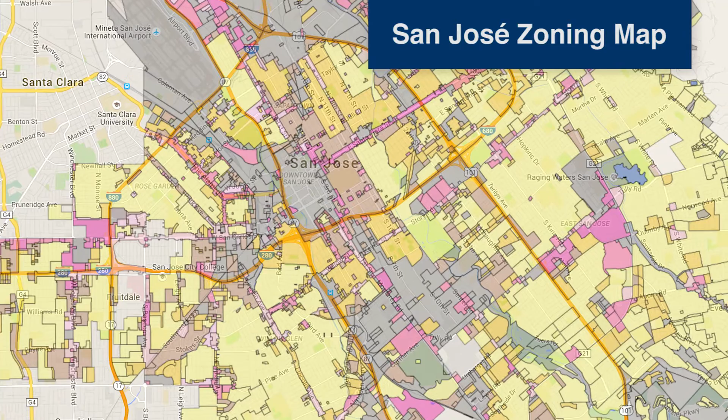You will benefit most from this video if you first identify the zoning of your property. Go to www.sjpermits.org and click on the zoning designation map. If your property is zoned R-1-5 or R-1-8, this video is for you. If zoned differently, speak with the city planner about your interest in an addition. The rules for setbacks explained here will still be helpful, so go ahead and watch.

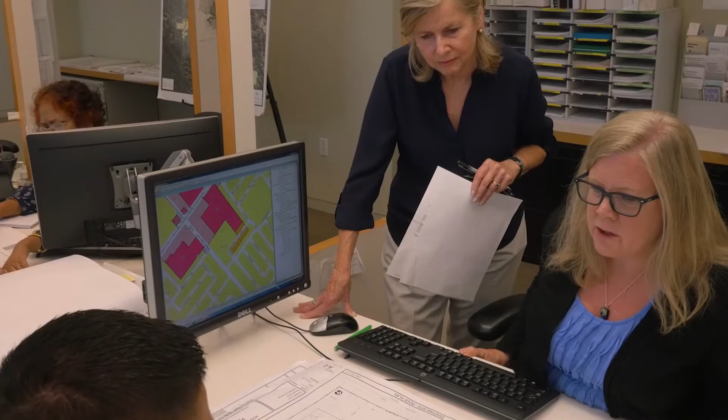Next, check if your property is listed on the city's Historic Resources Inventory. If it is, you'll definitely have to speak with the city planner before making any plans for an addition. Okay, are you ready? Let's begin.

Globally, San Jose is known as the capital of Silicon Valley and is the 10th largest city in the country. It's also a city of great neighborhoods. I'm Steve McHarris, the planning official for the City of San Jose.

Today we're going to talk about what you need to know before you draw up plans for an addition to your home. For an addition to a single-family home, we are going to ask you two important questions that determine your permit approval process. First, will the addition make your house higher than 30 feet from the ground or greater than 2 stories?

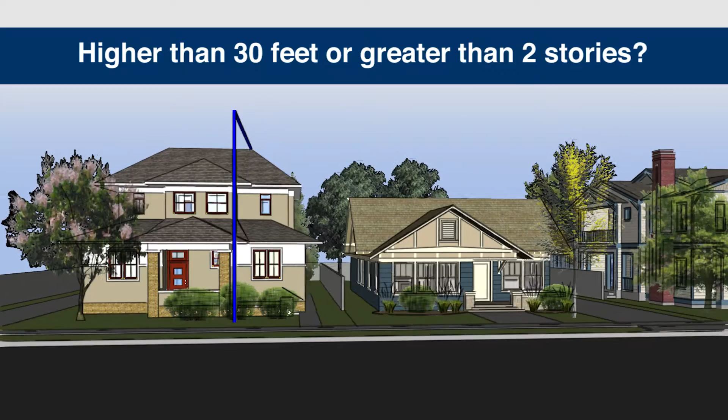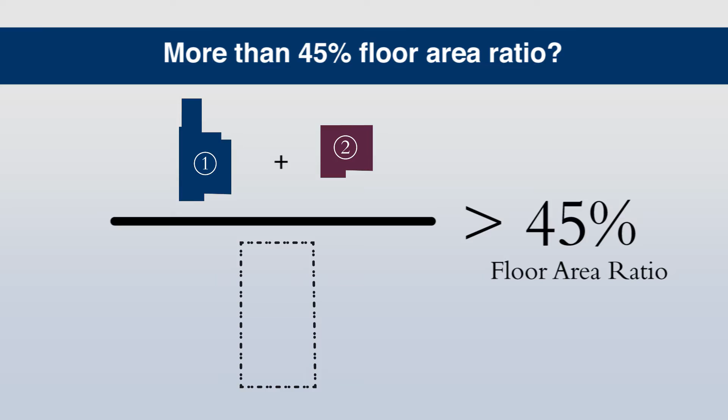Second, will the addition increase the floor area of your house to more than 45% of your lot size? If you answer yes to either question, you'll need to get a single-family house permit before you can get a building permit, and you'll need to review your proposal with a planner. Resources at the end of this video provide more information, including a form that will help you calculate your floor area.

It's probably becoming clear to you that the size of your addition matters. Let's talk to Eric. I happen to know he has an addition in mind. We can use his project as a way to explain the design requirements.

Hey Steve, thanks for stopping by. I really appreciate it. Hey Eric, how's it going? So here's my house. Our family's getting bigger and we want to add on another bedroom. Actually, we want to extend our den and put a new master bedroom over it. And we'd also like to expand our front porch.

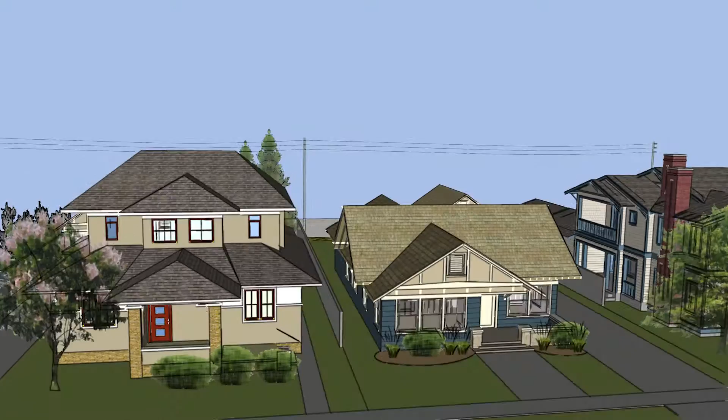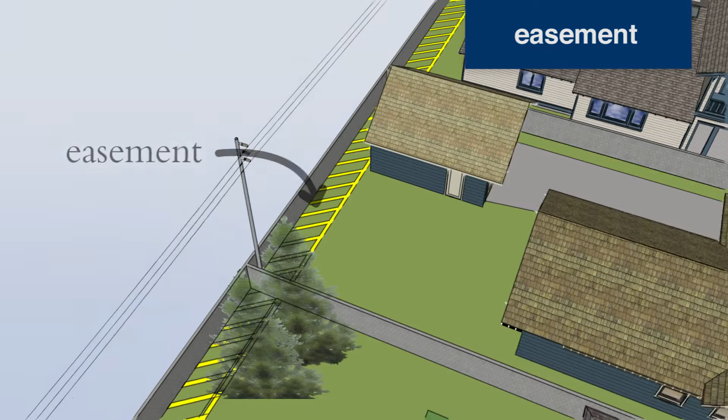Okay, so let's use your project to review the rules for setbacks for your addition. The first step is to find out whether there are any easements and building line limitations which might limit development on your property. An easement is a portion of a property that may limit your ability to build on it because it provides access to another property or access to electric lines, sewer lines, or other utilities.

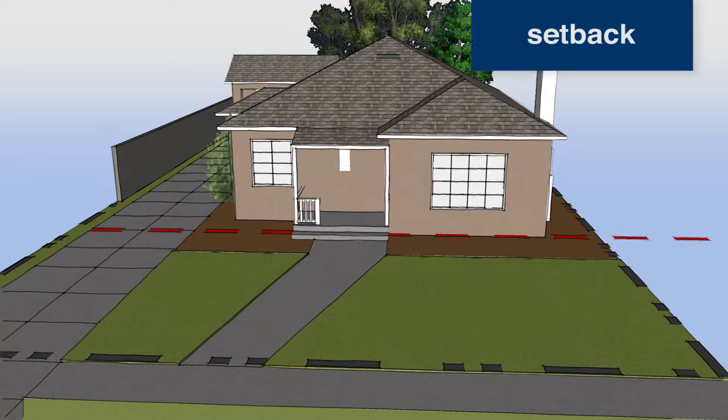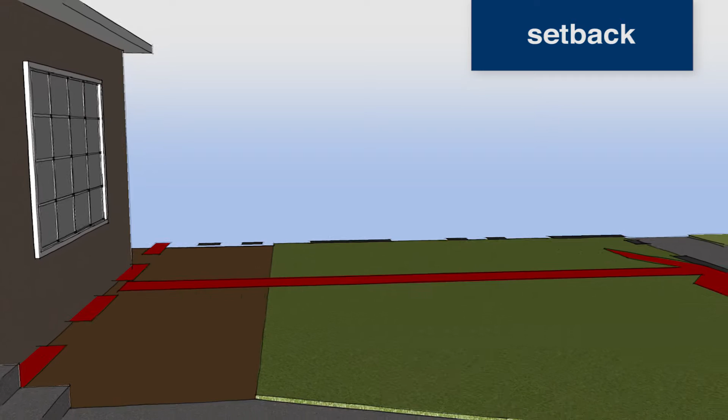You can find information about easements and building line limitations on a tract map. See the resources at the end of this video. The next step is to determine the required setbacks affecting your project. A setback is the minimum distance between the structure and the property line. In the front, the property line is typically 6 inches from the edge of the sidewalk closest to the house. It's measured from the exterior wall of the residence to the property line.

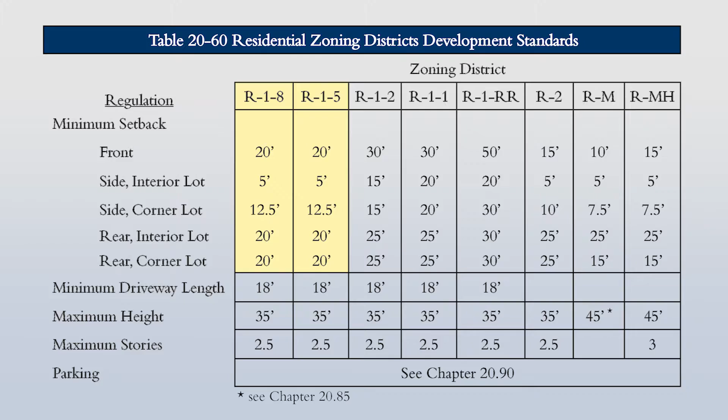This table shows the required setbacks for properties in the R-1-5 and R-1-8 zones. Once you identify the setbacks, you'll be able to build outside of those areas.

If you plan on removing a tree on your property, please review the tree removal permit application. See the links at the end of this video.

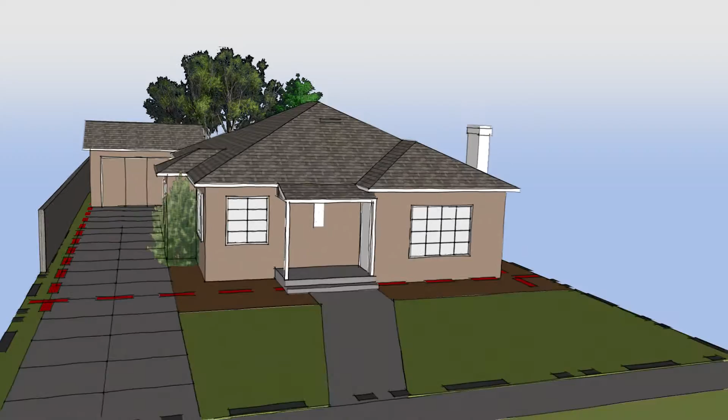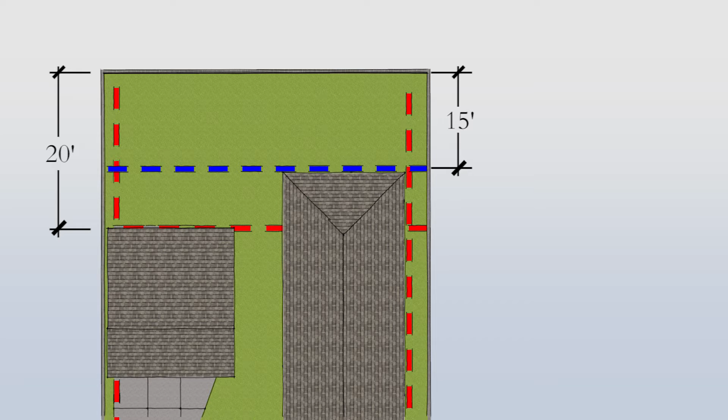There are many residential setback exceptions in the zoning ordinance. However, 2 of the most commonly used exceptions are for rear setbacks for a single-story addition and front porches. A 1-story addition to a home with no rear roof overhang may have a 15-foot minimum rear setback to the property line rather than the required 20-foot rear setback. However, the addition cannot cover more than 50% of the area between the 20-foot setback and the 15-foot setback line.

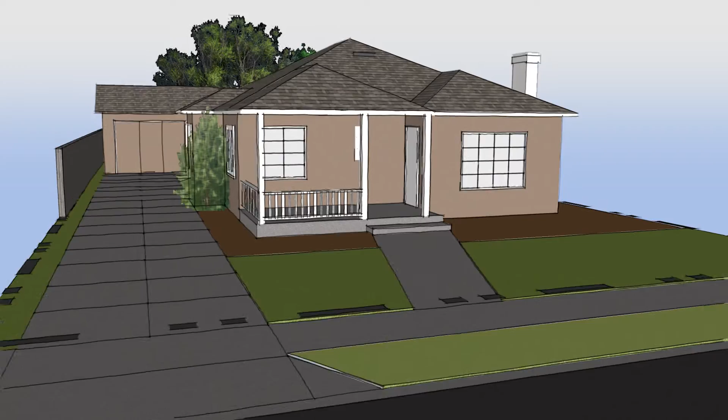If your proposal includes an extension of an unenclosed porch into the front setback, it may extend into that front setback area by up to 5 feet, including any roof overhang, as long as the porch is no more than 3 feet above the ground.

Okay Eric, that explains the rules for setbacks. Are you clear on what you need to do? Yeah, I think I've got it. Thanks for the help. Hey, here comes my neighbor Carmen.

Hey, hi Eric. Hi. I heard we had a professional planner in the neighborhood, and I just had to come over and ask, can I build a workshop in my backyard and a secondary unit? Well, there are requirements for those kinds of projects. Please see the resources at the end of the video.